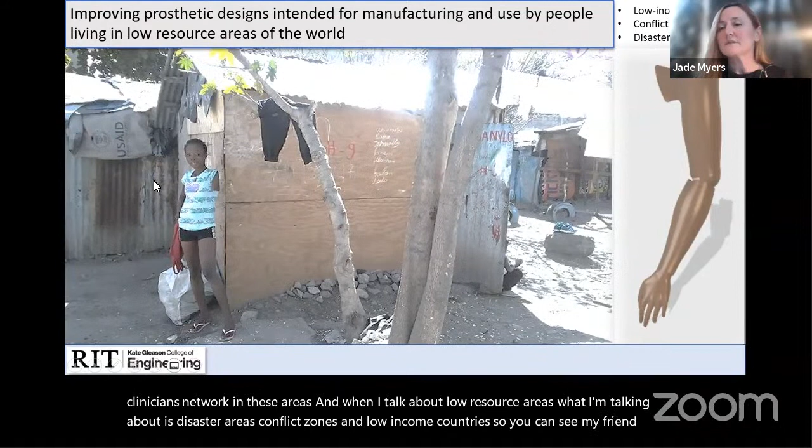So you can see my friend here, Dani. This is where she was living when I met her, when I first began working in Haiti. This is her house in what was known as a tent city.

The reason we've decided to focus on low resource areas is because that's where the highest need is for prosthetic care in the world. About 80% of people who live with disability live in low resource regions, and the World Health Organization estimates that only 5 to 15% of folks who could benefit from prosthetic and rehabilitative care actually have access to it. To me, that's not acceptable. I want to do something about that. So that's why I'm doing the research in the area that I'm doing research in.

The reason there's higher need for prosthetic care in these areas is because there isn't the same level of infrastructure for basic needs. This could relate to healthcare infrastructure. For instance, if there aren't very many healthcare facilities in an area, something like a minor cut on your finger, if it got infected and the person couldn't get to a healthcare facility for care, that infection could lead to an amputation.

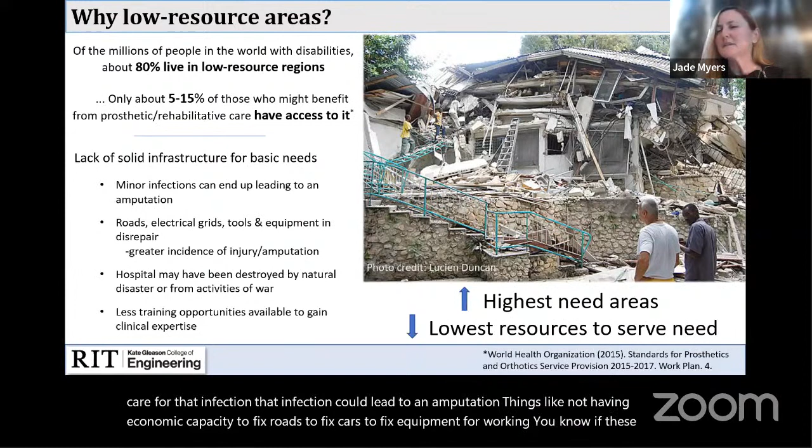Things like not having economic capacity to fix roads, cars, or equipment for working—if these things aren't maintained, that means more accidents happen, and more accidents means more amputations occur. One thing that surprised me when I began working in Haiti is that the electrical grid is such that you see high tension wires dangling in areas where children are playing. There's a high incidence of electrocution, and when people are lucky enough to survive these incidents, a lot of amputations occur. So all of these things combine to mean there are just a lot of amputations.

But when you're thinking about situations where you're in a war zone or a disaster area like Haiti, the few hospitals or healthcare facilities that exist can be destroyed in these situations. This photo here is actually a picture of the Healing Hands for Haiti clinic back in 2010.

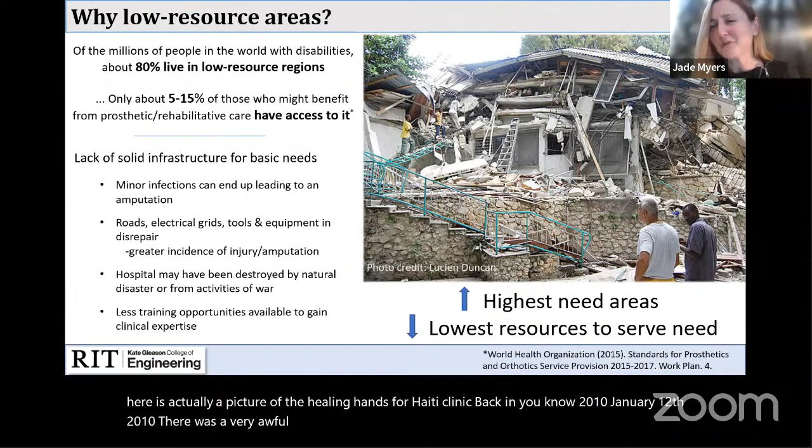January 12th, 2010, there was a very awful earthquake, and this was once a 6-story building. This happened in the afternoon when people were at work, so there were clinicians working to get people into prosthetics and orthotics, and many of them did not survive. Obviously that's awful on its own, but it's also awful because now there's even less ability to serve people who have a prosthetic need in this area.

And this is my friend Jean. He was one of 6 people to survive while he was working that day as a custodian in the clinic. Beyond the hospitals being destroyed and the clinicians being killed, there are fewer training opportunities available to get clinical expertise generally in these areas, so replenishing that system takes quite a long time.

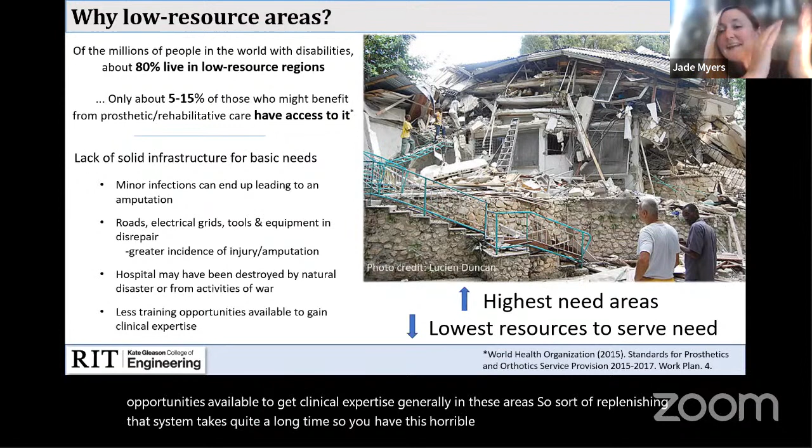So you have this horrible combination of high need and very low resources to serve that need. So, when you think about this, why—

use 3D printing, particularly low cost 3D printing, in these areas to create prosthetics? Well, in my experience in Haiti, working with prosthetists in the new Healing Hands for Haiti clinic that was rebuilt after the earthquake, these systems require a lot less equipment and materials than the large ovens, various grinders, vacuum formers, and things like that used in traditional means for manufacturing prosthetics.

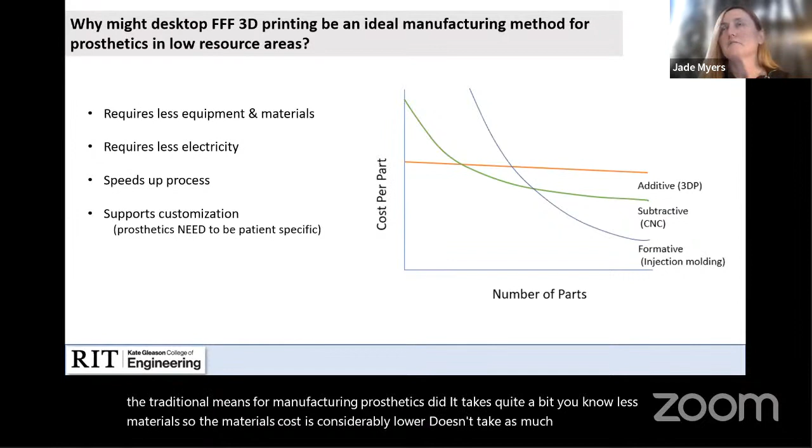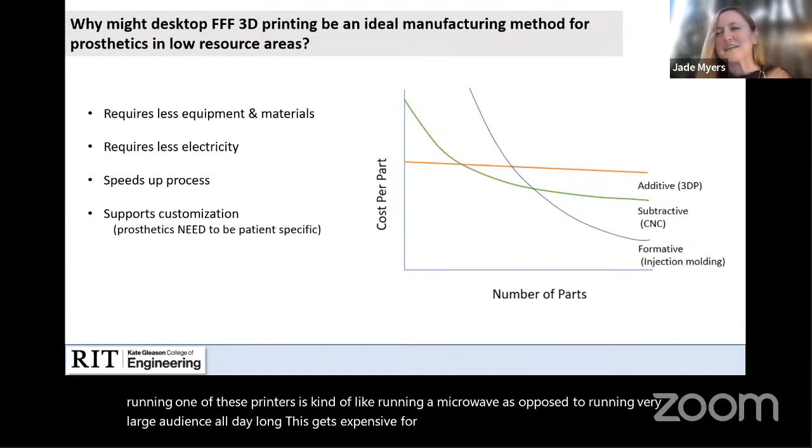It takes quite a bit less materials, so the materials cost is considerably lower, and it doesn't take as much electricity. Basically running one of these printers is kind of like running a microwave as opposed to running very large ovens all day long. This gets expensive for them, and the clinic only has electricity for 6 or 7 hours a day, typically.

So electricity is important. This process actually speeds up the process of making a prosthetic. When the stars align and everything goes well, a person could come in the morning, get their residual limb 3D scanned, have a prosthetic socket adjusted and fit to them, and all the parts of the prosthetic printed out, all during one day. They could leave with a prosthetic the same day, which is very important for people who may have mobility issues and may have to travel very far to get to a clinic in the first place. So it definitely speeds up the process when things work right.

That is not always the case. But I think very importantly, 3D technologies really support customization, and this is super important. If there are any prosthetists in the audience, which I suspect there may be, you know that each of these devices needs to be very patient specific. So you have to create, especially the sockets, adjustments to fit a person's individual anatomy.

Keeping in mind their bone structure, you want to pull the socket away from bony prominences, or press in on soft tissue. You don't want to press too hard on areas that might involve circulation, blood flow, and things like that. You don't want to injure neuromas and all these different considerations you have when fitting devices.

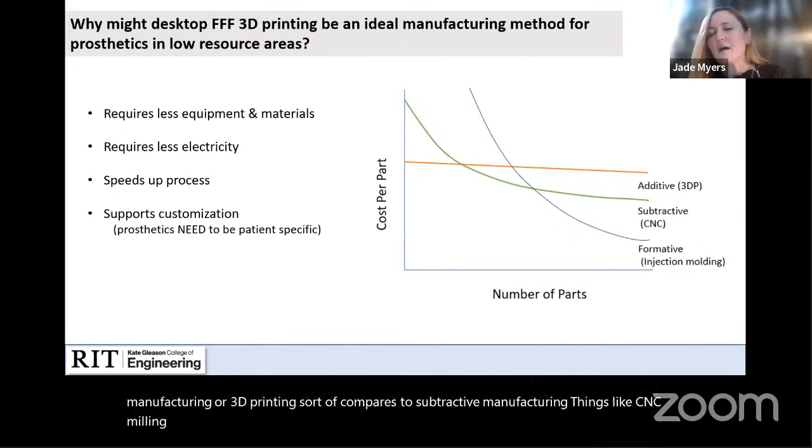So if you look at this graph, this explains a little bit how additive manufacturing or 3D printing compares to subtractive manufacturing, things like CNC milling, CNC lathe, or injection molding, when considering how many parts you need to make. So if you're only making one part specific to a patient, you have a low amount of parts, and the cost per part using these different means, you can see additive manufacturing is much less as far as cost per part. So that's definitely a benefit.

If you're making 10,000 parts, then subtractive manufacturing, injection molding starts to become more interesting for sure. But the setup costs are very high for those methods of manufacturing otherwise. Whereas additive manufacturing stays about the same no matter how many parts you make. So that's very attractive if you want to make just one part.

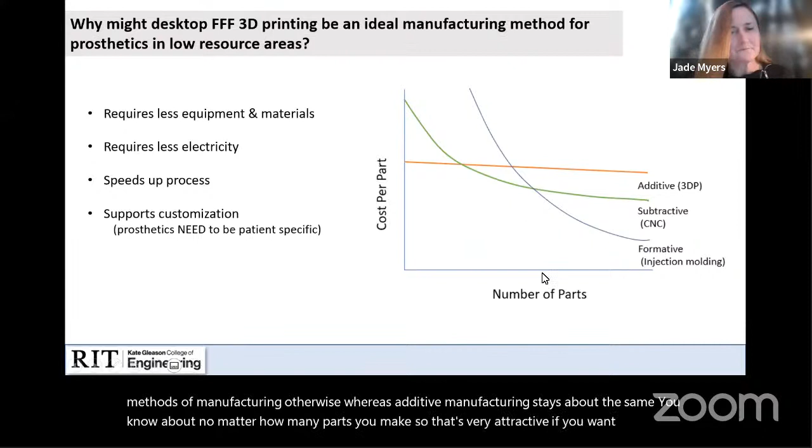But I'm not selling something, it's not all rose water here. There are issues with FFF 3D printing. Anyone in the audience who has printed anything probably already has had some experience with this.

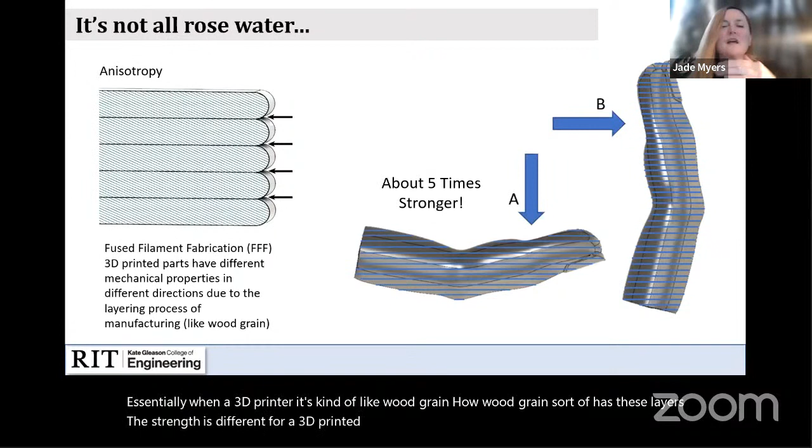But some of the things you really need to think about when designing for 3D printing with these systems is something called anisotropy. Essentially, a 3D printer's layers are kind of like wood grain. The strength is different for a 3D printed part depending on the orientation that part is printed in.

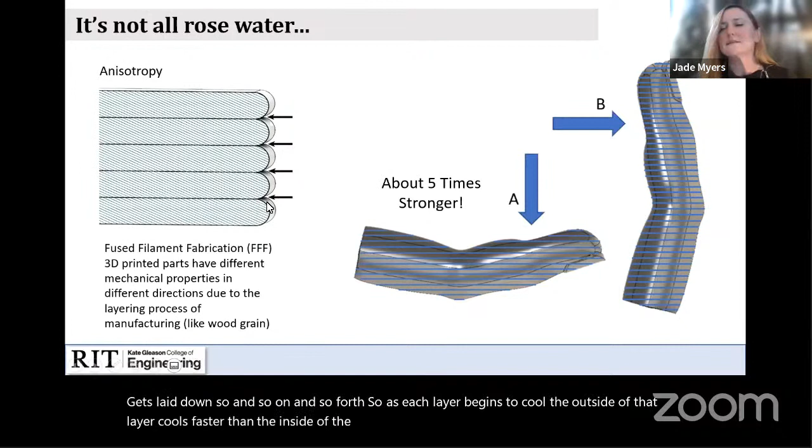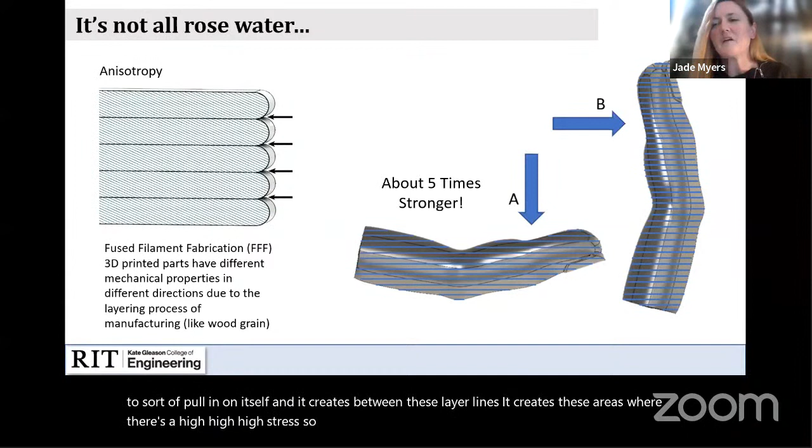Basically, a 3D printer will lay down a layer of material. That material will start to cool as the next layer is laid on top of it. That layer begins to cool, the next layer gets laid down, so on and so forth. As each layer begins to cool, the outside cools faster than the inside does, and so the material begins to pull in on itself, creating areas of high stress between these layer lines. So if a part is going to break, oftentimes it's going to break between those layer lines.

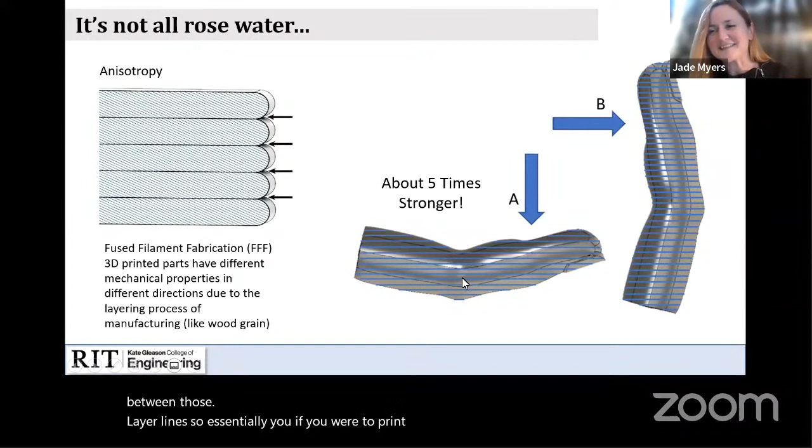So essentially, this is kind of simplistic, but if you were to print a finger in two different directions on a 3D print bed — if you printed it with the layer lines going one way, it's going to be about 5 times stronger than if you printed with the layer lines going the other way. So it matters for strength.

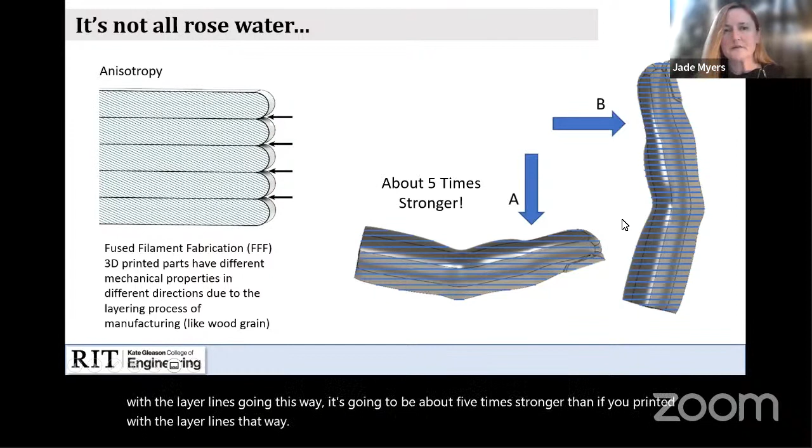So this is something that expertise in 3D printing can help you make prints stronger. But this is completely complex. I'm not going to go through each and every one of these — I'm sure you're very disappointed. But if you have questions about any of these, I can certainly talk about that later during question time.

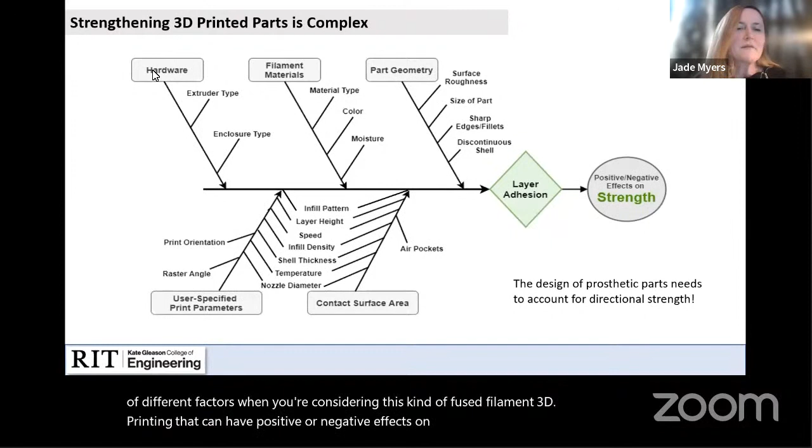There's a lot of different factors when considering this kind of fused filament 3D printing that can have positive or negative effects on strength. Some of these very generally have to do with what type of printer you're using, what type of filament you're using. Some materials have better strength in general, higher strength than others, and different kinds of strength is a factor.

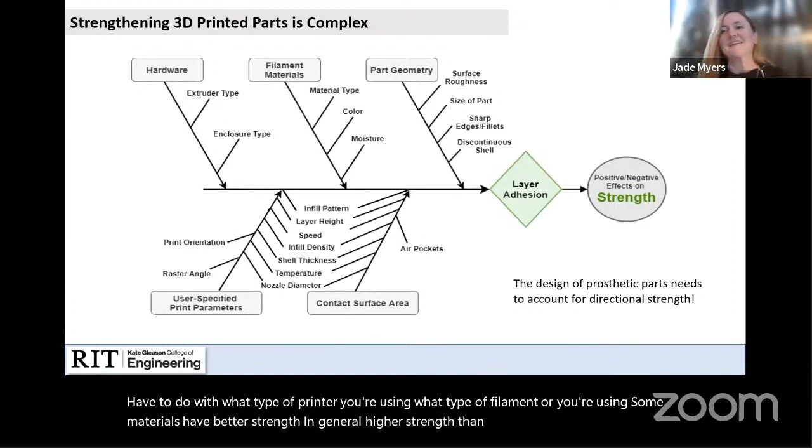Some materials like nylon, for instance, tend to really collect moisture. If you're thinking about 3D printing, the filament coming out of a hot nozzle — that nozzle is hotter than 100 degrees Celsius when printing these materials — so essentially you're boiling any trapped moisture, which creates tiny little pores and bubbles in your part and can cause surface roughness.

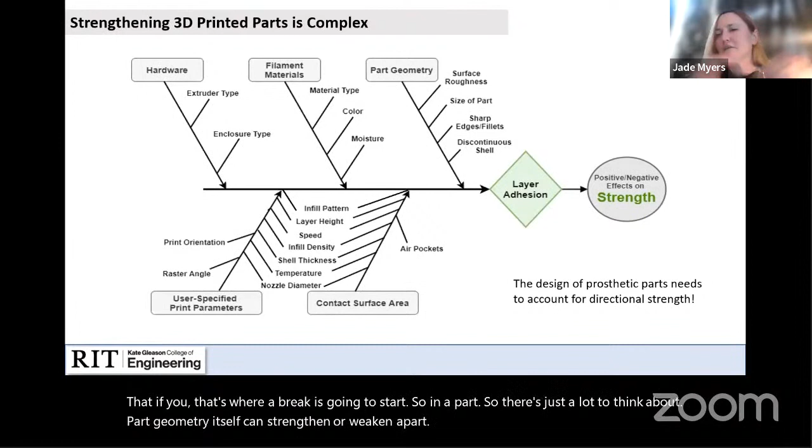Any of that surface roughness, any divots in the surface, can be points of stress concentration, and that's where a break is going to start in a part. So there's just a lot to think about. Part geometry itself can strengthen or weaken a part, and there are a number of user specified print parameters that can have different effects on a part's strength. So when designing parts for prosthetics that are going to be 3D printed using FFF printers, you really have to account for all of these factors within the design.

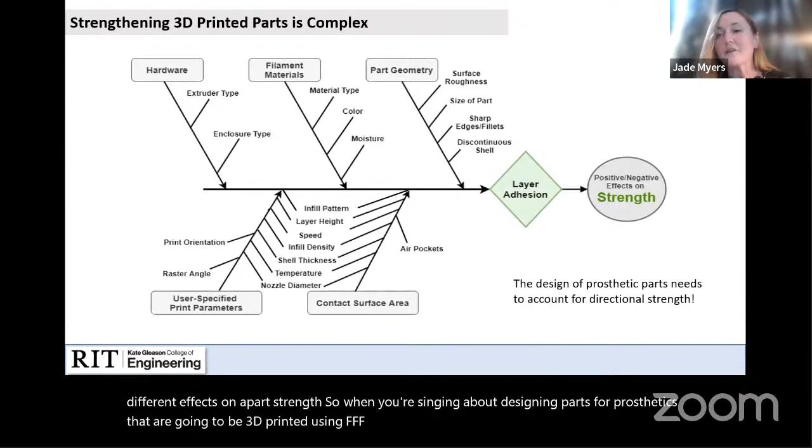Prosthetists already have an expertise. So if your goal, like mine, is to create device designs that can be 3D printed by clinicians in these areas, then they shouldn't have to learn a new expertise in 3D printing. They shouldn't have to know all of these different variables just to leverage the technology to create these devices. So part of designing these prosthetic parts is to bake the engineering requirements into that design.

It's really good to have that. It's been, in my experience, a nice exchange of knowledge. I've been working with some CPOs, prosthetists and orthotists in Haiti, and they have given me a wealth of information on clinical needs for devices, and I have tried to give them more information on 3D printing and CAD, and the engineering aspects. So co-designing in that way has been beneficial to everyone.

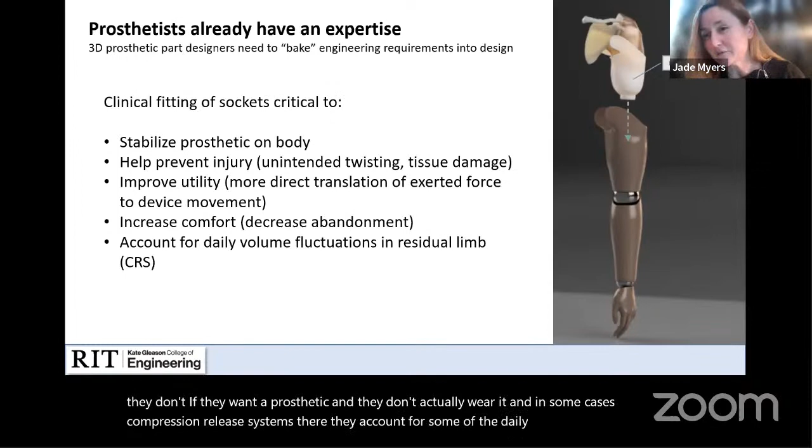It's also there to improve utility, so that when a person intends to move, that force is translated into device movement in the way it should. And it's meant to increase comfort, hopefully, so that people don't abandon their devices. What's the point if they want a prosthetic and they don't actually wear it? And in some cases, compression release systems account for some of the daily volume fluctuations in residual limbs, which is something that happens.

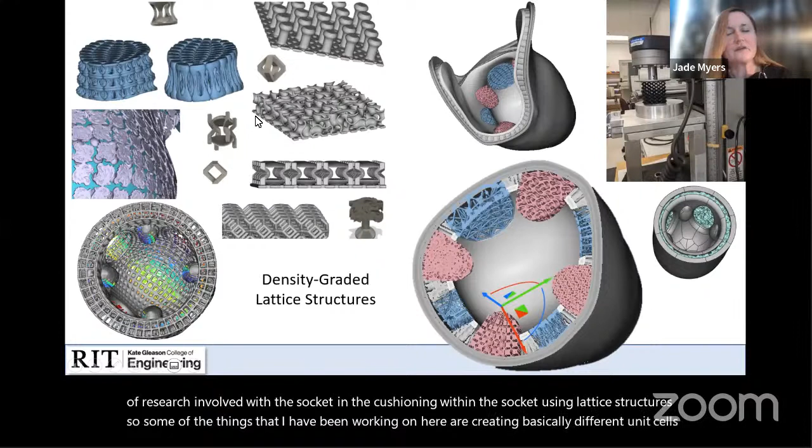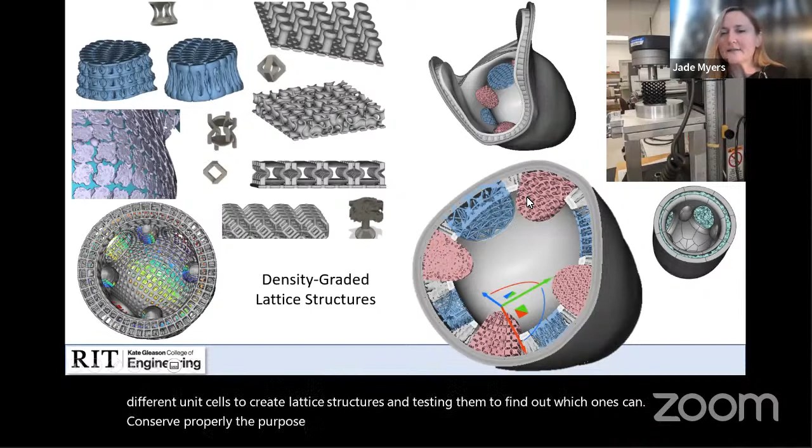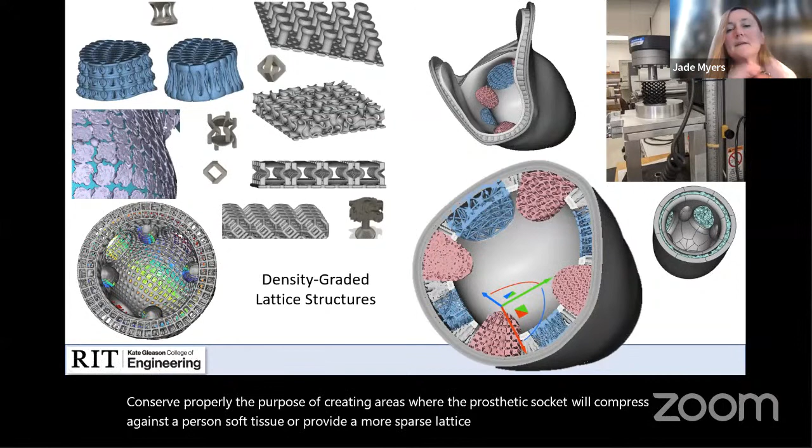This brings us to some of my current research. As I said a little bit earlier, I am doing a lot of research involved with the socket and the cushioning within the socket using lattice structures. Some of the things I've been working on are creating different unit cells to create lattice structures and testing them to find out which ones can serve the purpose of creating areas where the prosthetic socket will compress against a person's soft tissue, or provide a more sparse lattice where a person's soft tissue can release into a more open area. So you can get that stability and that function there.

What I've been working on is actually density graded lattice structures. It's a bit of a mouthful, but that means that by altering the density of that lattice structure, that's how you can get the functionality you want in different areas of that socket.

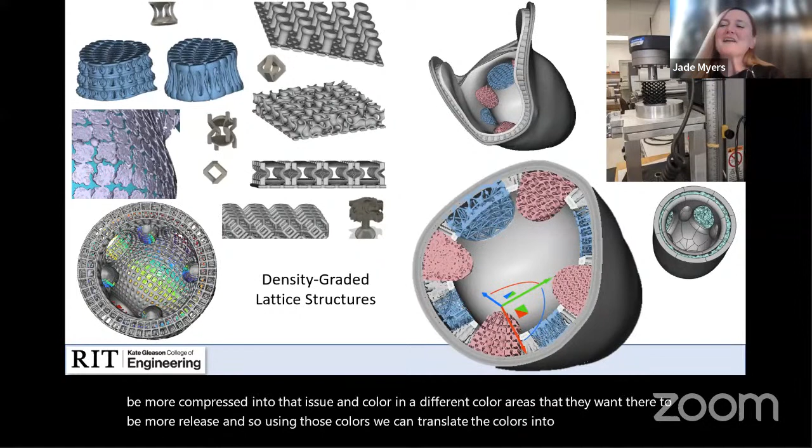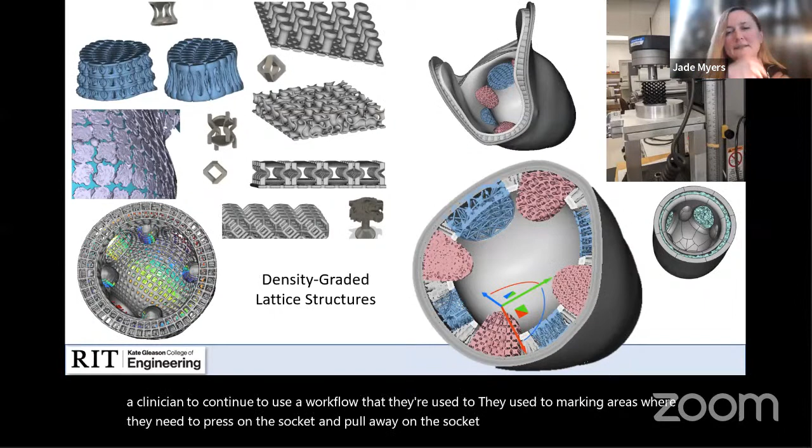What I've been doing is trying to create a workflow so that a clinician could use color in a 3D software platform to color the areas, specific to their patient, where they want areas to be more compressed into the tissue, and color in a different color areas where they want there to be more release. Using those colors, we can translate them into math that controls the density of the lattice structures in those areas. So it's a way for a clinician to continue to use a workflow they're used to - marking areas where they need to press in on the socket and pull away on the socket - and that translates into how dense a lattice structure for padding in that socket is.

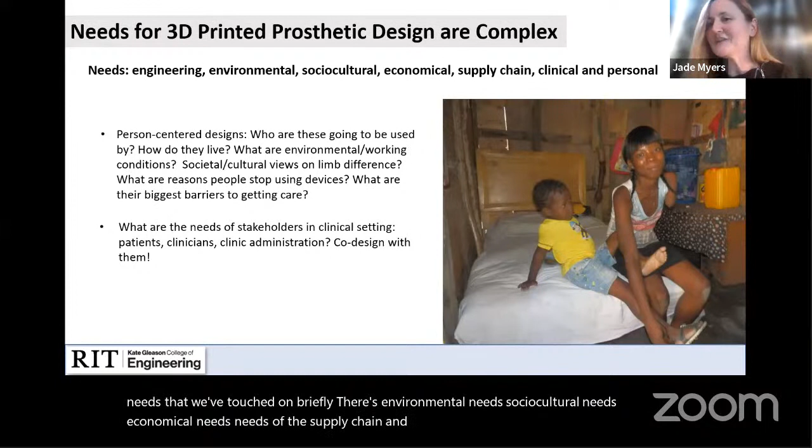So hopefully I've gotten across the point that the needs for prosthetic design are very complex. There's a lot to it. It's more than just engineering needs, more than just the clinical needs we've touched on briefly. There's environmental needs, sociocultural needs, economical needs, needs of the supply chain, and certainly very personal individual needs of the person who's going to be wearing the prosthetic. So we really want to think, when we think design for devices like this.